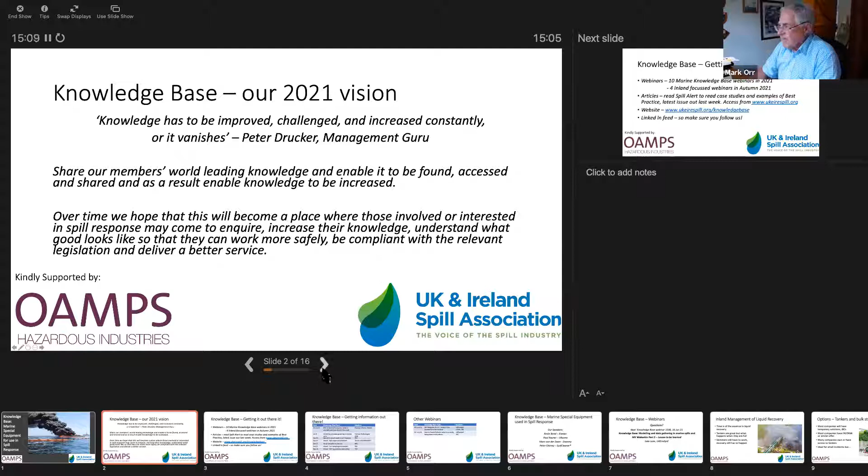And over time, we hope that our knowledge base, which is accessible through our new website, ukeirespill.org, will become a place where those involved or interested in spill response may come to inquire, increase their knowledge, and understand what good looks like, so that they can work more safely, be compliant with the relevant legislations, and deliver a better service. And during this year, we're delivering 10 marine knowledge-based webinars. We've got 4 inland-focused webinars, which will be in the autumn of this year.

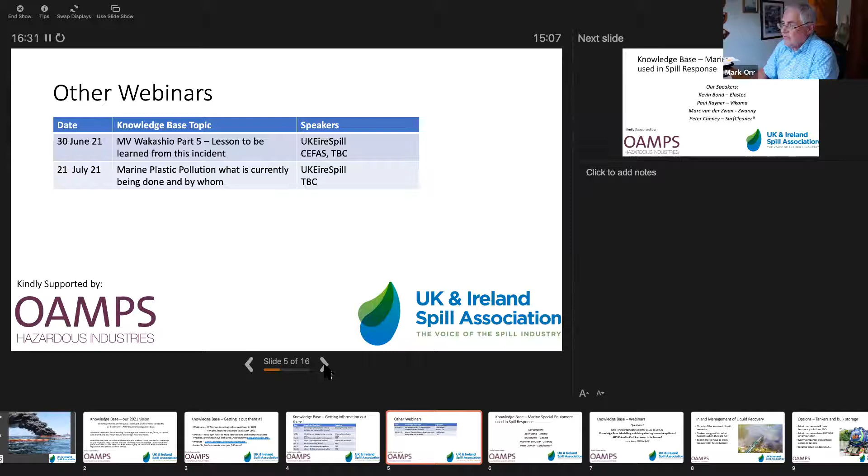In particular, we've been following the MV Wakashio, which has had a lot of learning come out of it. A lot of learning is still to come out of it, and we'll be hosting a webinar which will try to bring together the lessons to be learned from this incident. And then we're also doing one on marine plastic pollution, and some of the products we're going to talk about today are relevant to its recovery, but we'll be doing a marine plastic pollution one in July.

So today we're talking about marine special equipment. Now, what is marine special equipment? Well, we've called it that because really we needed a catch-all to cover the things that we haven't covered so far. So in the webinars that we've covered so far, we've done skimmers, absorbents, dispersants, we've done booms, and really, we've done those 4. And really, this is a sort of catch-all for anything that we haven't quite covered so far.

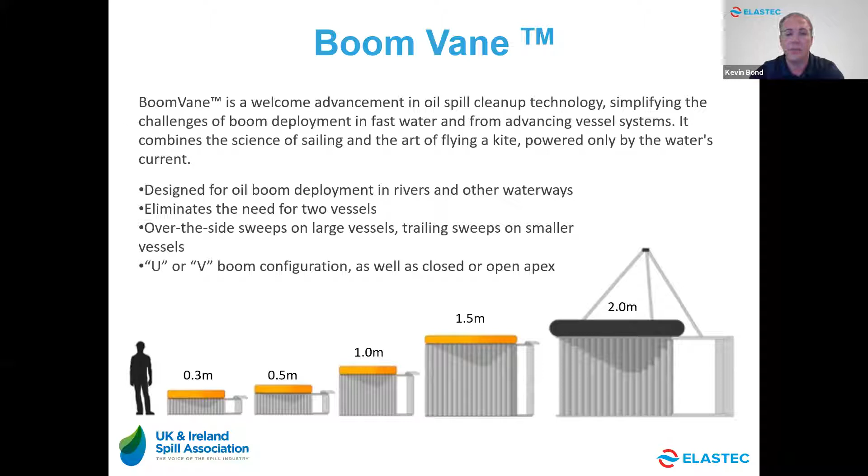So the smaller boom vanes, mostly designed for shore-based operations, shallow waters, less than a meter deep. And then you've got the boom deployment for fast currents without using boats. It can also be utilized in wider rivers with sweep operations as well.

The half-meter boom vane, also designed again for fast-moving shallow rivers. We use it extensively on training courses we have at our workshops twice per year.

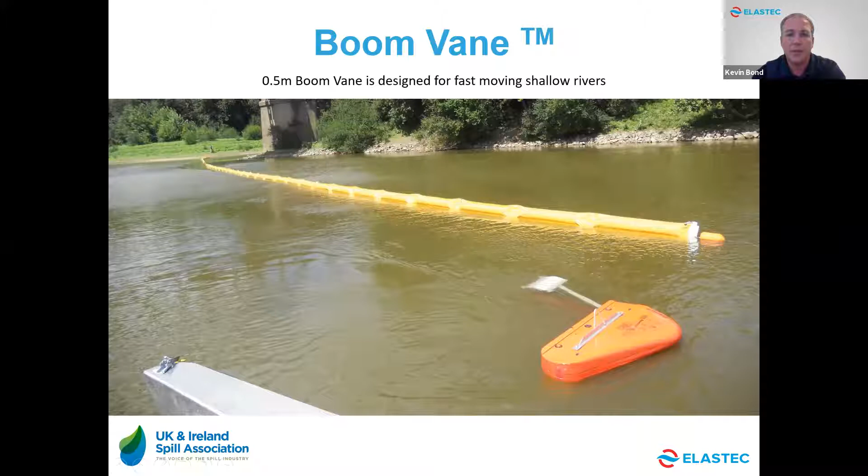The 1 meter boom vane, again, very useful with side sweep systems. There's the X150 system that we have. There's also the Current Buster. There's other sweep systems available that these particular vanes are very useful with for single ship operations.

The 1 meter boom vane is constructed with vertical wings, again, utilizing the current. It's held by a single mooring line. It swings out towards the opposite shore or from the vessel and tows the boom. Very powerful, light and handy tool, enables you to be operating in waters with heavy traffic. It's got a control rudder on it, so you can bring the boom vane back to the shore or back to the vessel as you need to.

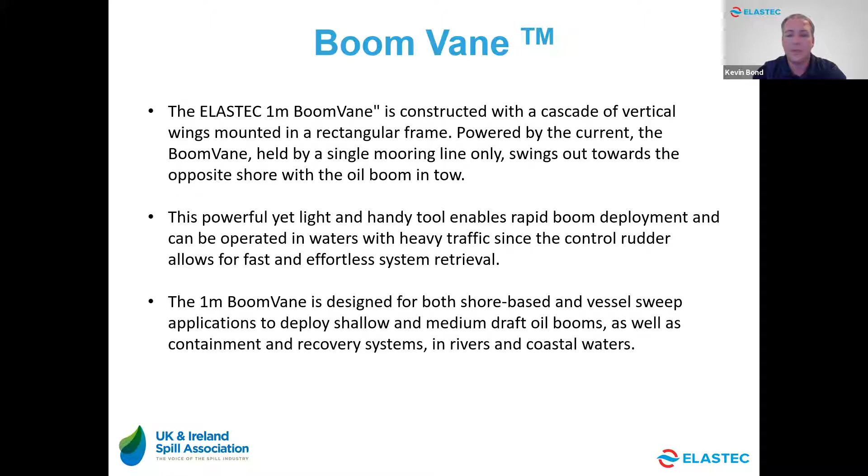So the next size up, the 1.5 meter boom vane, proven for mostly offshore situations, towing booms and fast sweep products. 200 meters of offshore containment boom. It's easily towed in different configurations, and gives you the ability to maintain sweep operations over long periods of time.

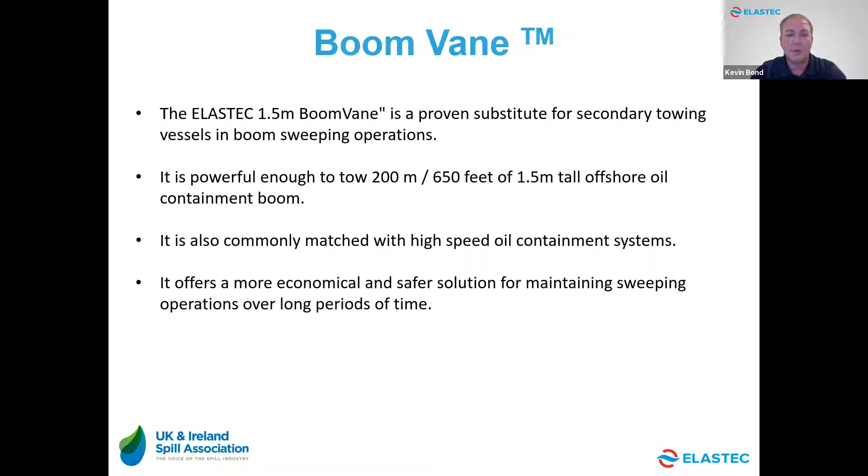Again, you need to have the right vessel with the right equipment to be able to maneuver this boom vane into the water. Same with any offshore operations, you need to make sure you've got the right vessel at hand.

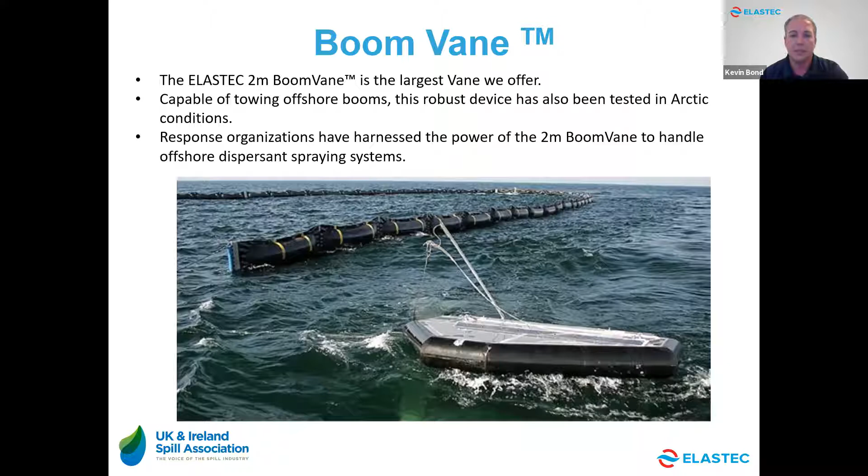We also have the larger 2 meter boom vane for the more serious offshore situations. It's also been tested in Arctic conditions, so it's really the offshore response organizations utilizing this system as well. So different size boom vanes for different operations. And again, you can see some of the size differences there, just how big the larger one can be.

I'm just going to run through a short video here. Hopefully it works. Hopefully you can all hear it.

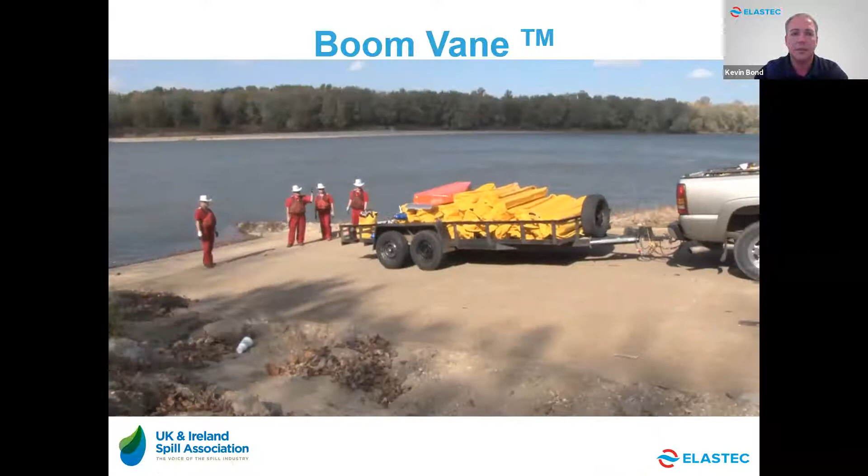This is just going through a typical deployment of a boom vane in a river. This is the 1 meter boom vane. So the guys now are just heading further up the shore to put in the tow line. Mooring points can be any sturdy trees or ground anchors, whatever you're able to find in the location.

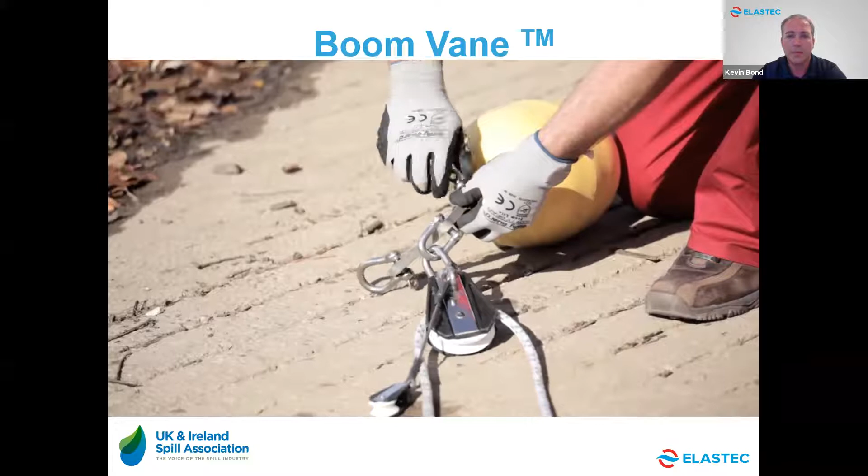You will need some assistance to get the boom vane into the water, so safety waders and life jackets whilst on the shoreline. The orange reel there is the return line for the rudder. As soon as the boom vane hits the current, you can see it operating and pulling out into the middle of the river. Typically, shallow draft booms operate best in this situation.

And in this situation, it's important to work out where your catch point is going to be for the boom, and making sure that you've got enough area to put a skimmer in or whatever recovery device you're going to use. You can use a series of these systems going up and down the river as needed, depending on the spill and the spill site. So now they're just reeling in using the return rudder.

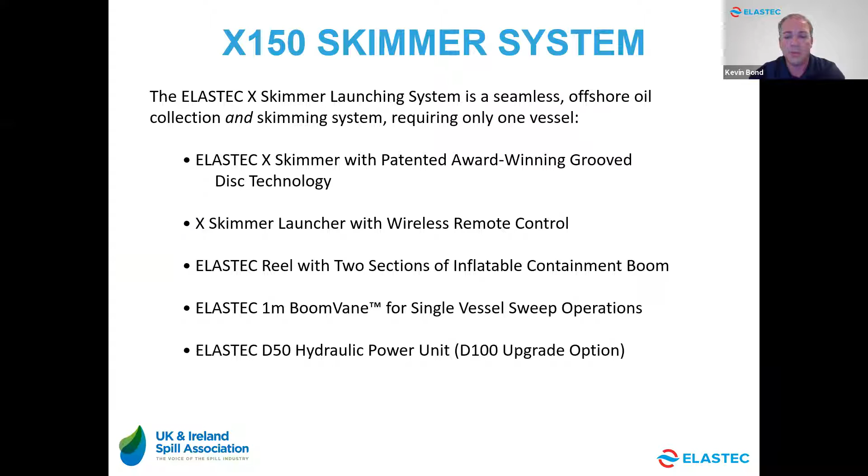It can be self-contained, so you can keep it in a container for shipping. Makes it very, very transportable. You can deploy the system in about 30 minutes, depends on how many boom sections you've got and the experience of the crew. We recommend a three-man team for the operation, 1 for controlling the remote, and then 2 just to make sure that everything's all connected up okay.

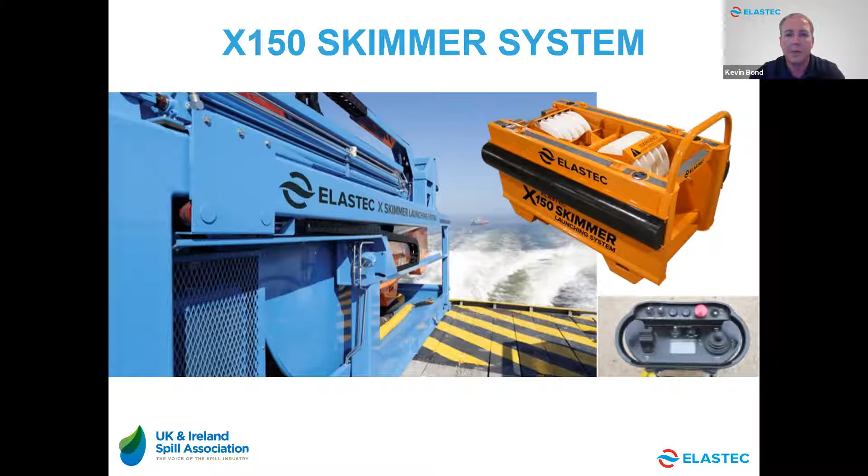So you get the remote control system there, and then just some more detail of the X150 skimmer. And we'll go into a bit of detail on the design of the skimmer in the video towards the end of this part. So the skimmer itself is a centerpiece. It's easily deployed using the crane on board. It can be towed at speeds of up to 4 knots, and the system in up to Beaufort Scale 4, which, as recommended, is usually the maximum limit for crew safety when you're out offshore.

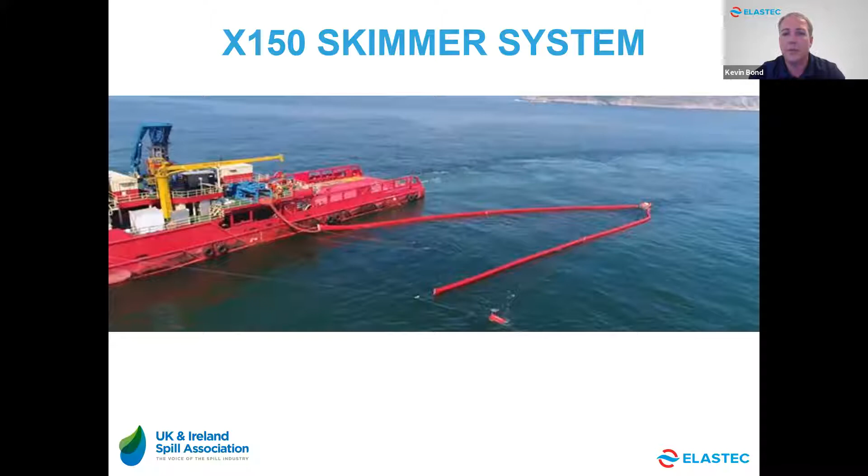The collected oil is transferred to the towing vessel directly from the skimmer. It's got the integrated hoses there from the skimmer pump straight back on board the vessel. Just some pictures of the system in use. You can see the boom vane there at the bottom of the picture with the towing booms guiding the oil into the skimmer, and then the transfer hoses coming back on board the vessel. Just a rear view shot giving you the profile of the system.

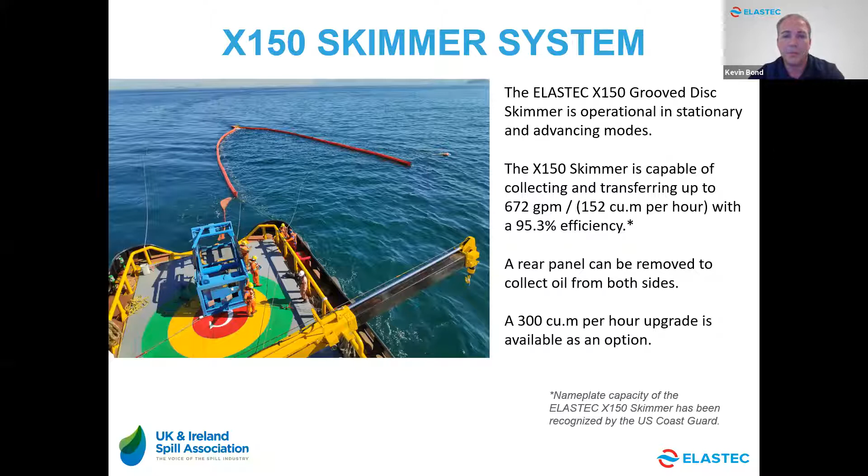So you can operate it in stationary or advancing modes. The skimmer will draw the oil towards it. But in this particular mode, you're looking at advancing skimming systems. You can collect with this particular system up to 152 cubic meters per hour with a 95% efficiency. You can increase this depending on the pumps which are situated on board the skimmer. So with that upgrade on the pump, you can double the capacity. And again, I'll just do a short video on that system itself.

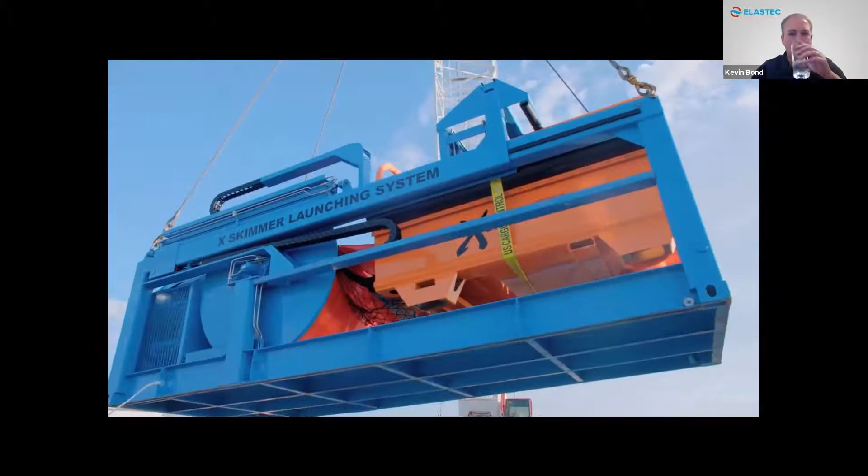We're here at Port Fourchon here in the Gulf. This is home, this is where we started. This is how we know if we've got a successful product. If we're there and we're doing it ourselves, then we know that our clients are going to be satisfied. We're going to ship around the world. They have to open that box. That product has to work. There's not very many people that go the extra mile that we do. We have a diverse product line. They're backed up with our quality, our design, our service, our experience. We feel good about what we do because there's a global need for these products.

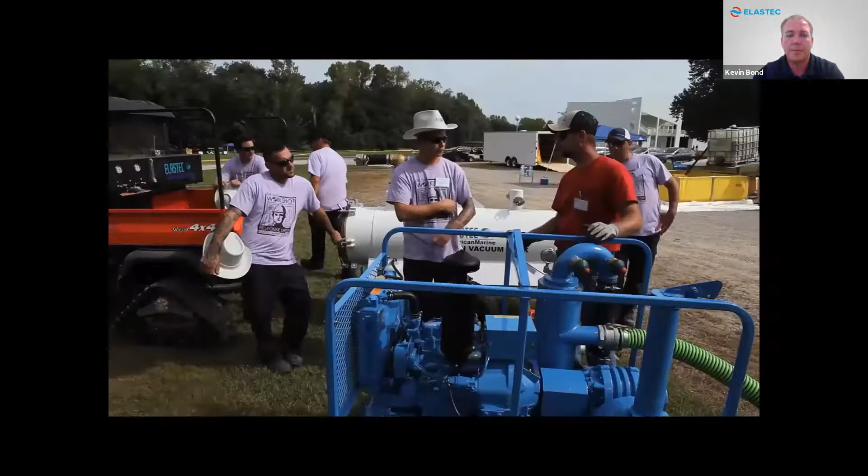Containment booms, controlled burn operations, a full line of skimmers to pick up all oil types, vacuum systems, incinerators. We have a very popular small line of incinerators for medical waste. We sent equipment to Africa for the Ebola outbreak. We have products for all of those types of issues. We like to offer complete solutions to all types of response. All of those things are helping to keep the world clean. And to me, that's what Elastec is all about.

During the Deepwater Horizon, we were burning oil offshore. There were, of course, skimmers and dispersants used, but most of the skimmers there really didn't catch that much oil. The skimmers that we employed at the Deepwater Horizon were just not up to the task. Old skimmer technology was overrated and it underperformed. We saw a need in oil spill recovery and felt we needed to have a different type of skimmer to be able to deal with oil spills.

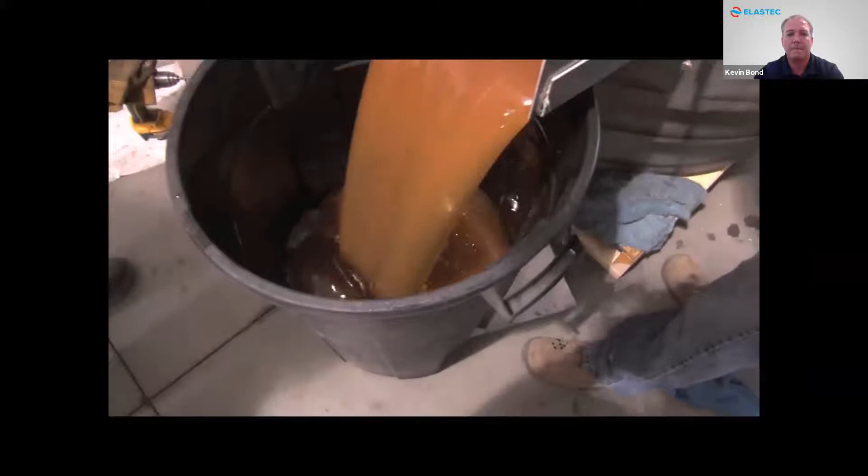This is the Wendy Schmidt Oil Cleanup X Challenge, the $1 million contest to build the world's fastest skimmer. For the competition, we scaled our disc skimmer to pick up 5 times more oil than any skimming system that has ever been built. What can I say? We built the best skimmer in the world. Please congratulate our $1 million first place winner, Team Elastec American Marine.

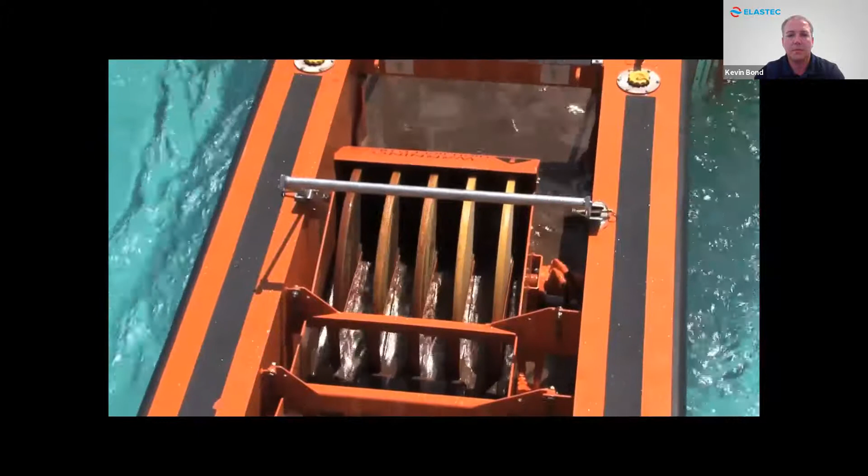Well, now we're into a commercial version of the X skimmer. This is the X150. It has 10 discs, and we're ready to take this to the marketplace. We can use the X150 in advancing mode up to 3 knots. We can also use it in a stationary mode or near shore or harbor applications. We had the opportunity to build the perfect skimmer. I think we pulled that off.

The X150 launching system skimmer is a turnkey operation. Everything that you need to do the job is there. It's an integrated device that allows you to launch and retrieve the skimmer, the boom, and a boom vane with a single vessel. It only takes 3 people to operate the X150. One person actually running the remote, and then a couple of people to keep an eye on things. It's a very simple operation to do.

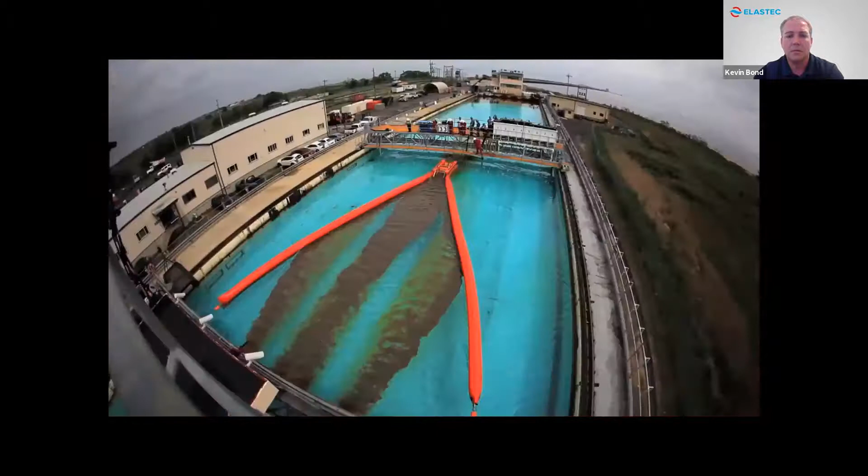When you're using our boom vane, you can operate with a single vessel tow system. This will operate the system up to 2 to 3 knots. The X150 will recover up to 660 gallons a minute, 150 cubic meters per hour, doing light, medium, and some heavy oil recovery. I'm pleased to announce the X150 is the first model in our new line of X skimmers. The X150, it's a whole new ballgame.

So that was just a brief there on the X150, again, born out of some of the Deepwater Horizon issues that they found with traditional skimmers not doing what they needed to do. Also born out of the Deepwater Horizon spill was some of the fire boom testing and the results that were found. I'll just run through some of the details of that through this presentation here, and then I'll hand over to Paul.

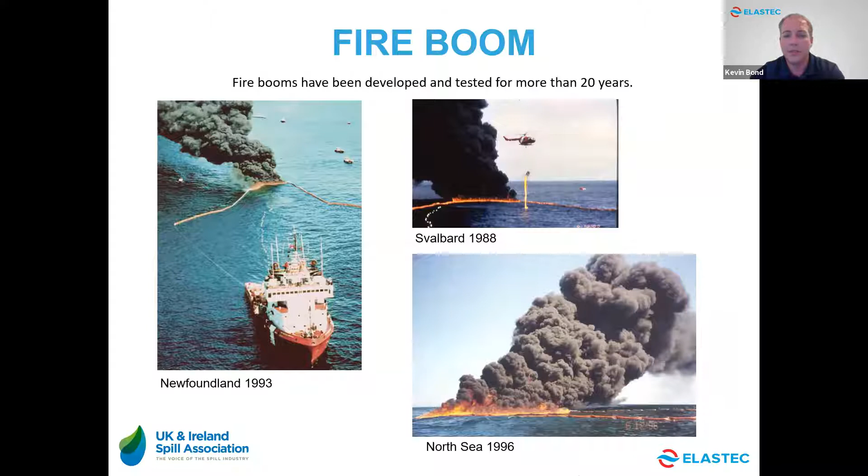So these were developed and tested for more than 20 years. They just never really had a real life situation like the Deepwater Horizon to test them in. You've got Svalbard there, 1988, Newfoundland 93, and then the North Sea 1996. So plenty of tests, and also in test tanks that had been done in the past. The small scale tests just weren't as intense as what was seen in the Gulf of Mexico.

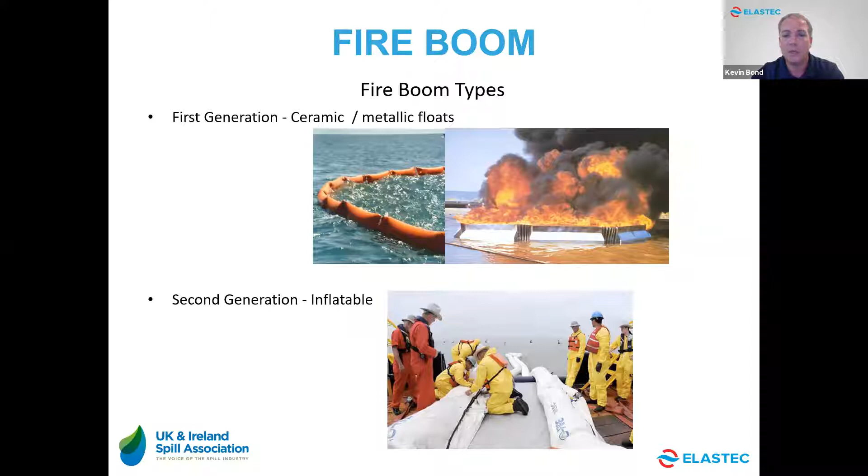The different types of fire boom: you've got the first generation, your ceramic or your metallic floats, your solid fire booms. And then you now have a second generation, which is the inflatable type, and we'll go into some detail on that shortly. The models that we used during the Gulf of Mexico: you've got the American Marine or 3M boom there, you've got the Hydro-Fire boom, and then you've got the Pyro boom. And then you also had the Oil Stop and a Kepner version, which we used.

So a total of 411 controlled burns were conducted from April 28th to July 19th. Using 5 different types and generations of fire boom gave a really good broad coverage of different booms used. It worked out during that particular spill that controlled burning was the cheapest and the best alternative to traditional skimming methods.

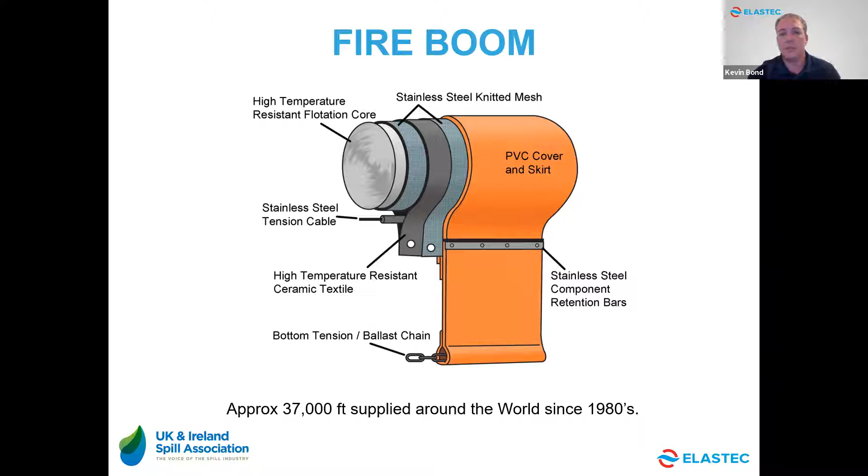So the American fire boom, again, solid flotation booms, PVC cover with a skirt, and then you've got the stainless steel mesh twin inside with a high temperature resistant flotation core. Then you've also got the ceramic textile in between the steel mesh, and then a ballast chain to make sure the profile on the water stays right. Once this is used, obviously the PVC cover does get destroyed in the temperature, but once you've got that back on board the ship, you can replace that by taking off those stainless steel retention bars and recovering it.

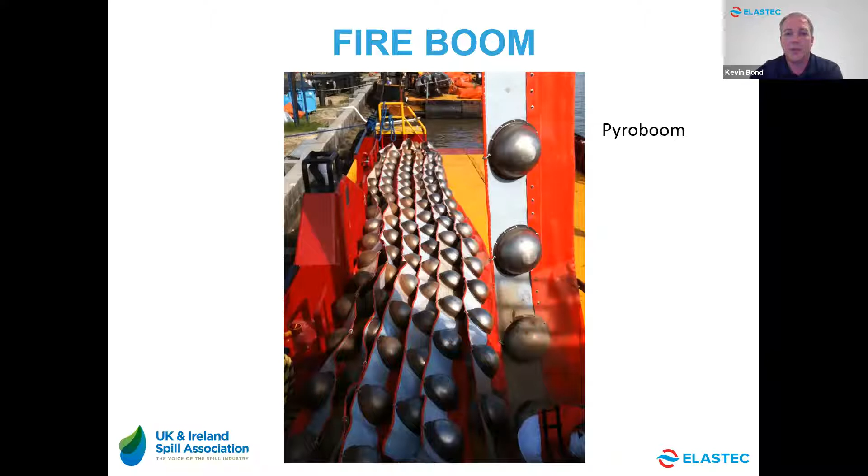Then you have the oil stop, again, a solid flotation ceramic boom. You also have the Pyro boom, which is more of your ceramic steel foam covered Pyro boom. Then you've got the second generation Hydro fire boom.

So water cooled, it's inflatable, and you might think, well, inflatable boom with fire doesn't actually go, but when it's got the water jacket going around it, it gives the fire resistance across its entire length. And you can deploy it and recover it without the use of cranes. As long as you've got your onboard boom reels, you can deploy and recover it, and then you can recover it again if the weather deteriorates.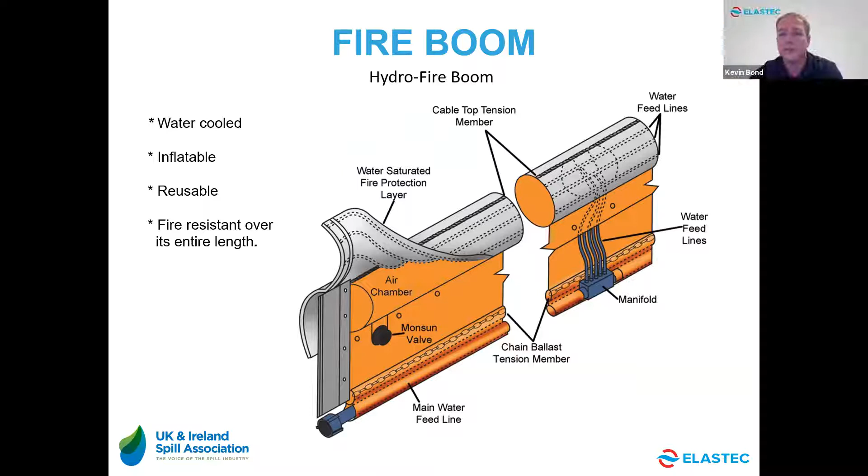So you've got the water saturated cover, the air chambers below it, and then pumping through the bottom with manifolds going up to the blanket. You've got your water, which coats the blankets, your feed lines. Containerized system, again, making it easy to ship globally.

And in this particular situation, so the Gulf of Mexico, the on-site management team consists of the O'Brien's Group, Elastec, and the US Coast Guard. So a total of 240 people, 49 vessels, 15 burn teams, and 3 task forces.

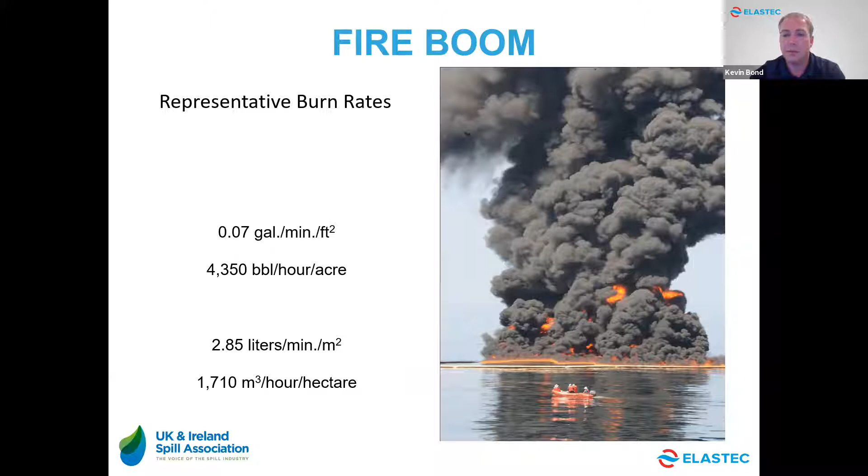So to start the fires, there's a couple of options. More recently, there's a drone version, which NOFO were utilizing and testing with not too long ago. You've got a heli torch option, which is probably not the most preferred version because it can be sometimes difficult to light it. If the conditions allow, then just floating ignition devices from a boat as close as you can get to the oil. So representative burn rates give you some of the ideas there of what can be expected by utilizing fire booms.

During the first trial burn, so it was about an hour in length, they managed to actually get the burning plans and the approvals and procedures in place to be able to utilize the fire booms during the spill in the Gulf.

So multiple burn teams were created. That meant that they could go out in shifts in different areas wherever the oil was, utilizing different booms that were available to them. And then one particular day they had the Mega Burns Day, which was June the 18th, and they managed to dispose of an estimated 70,000 barrels of oil. So that was a good result for cleanup day.

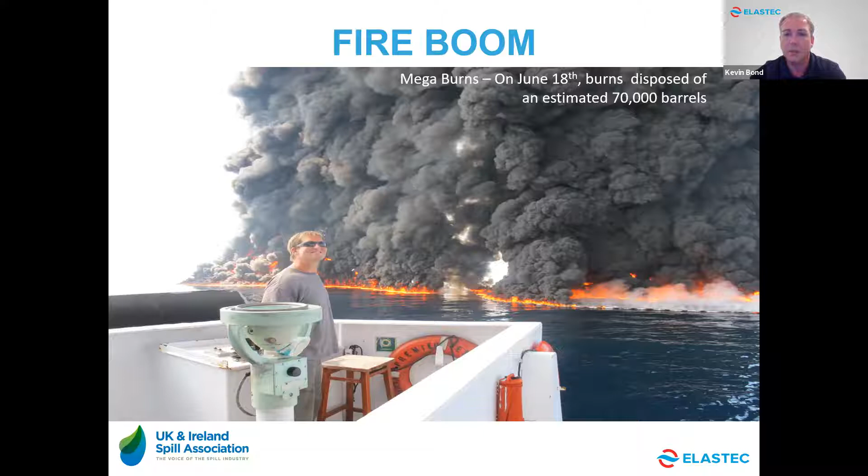Throughout the spill, all the emissions were monitored by the Environmental Protection Agency, and details were noted. So aerial surveillance during this was absolutely critical to make sure that the boats were in the right position. They could keep an eye on things and then monitor the fires and the oil as the spill went through.

We also found that the fire was jumping from the boom being towed. You had a nice pocket of oil which you can then have on fire. Depending on how the oil moved, if it got away from the boom apex, it would come out behind it and also set some other oil patches alight.

So the Hydro fire boom in particular had the longest recorded burn of 11 hours and 48 minutes, and then also 10 hours and 20 minutes, and that apparently set a Guinness World Record. I didn't realize there was a world record for fire boom. So it just goes to show that in the right conditions, you can actually burn quite a lot of oil.

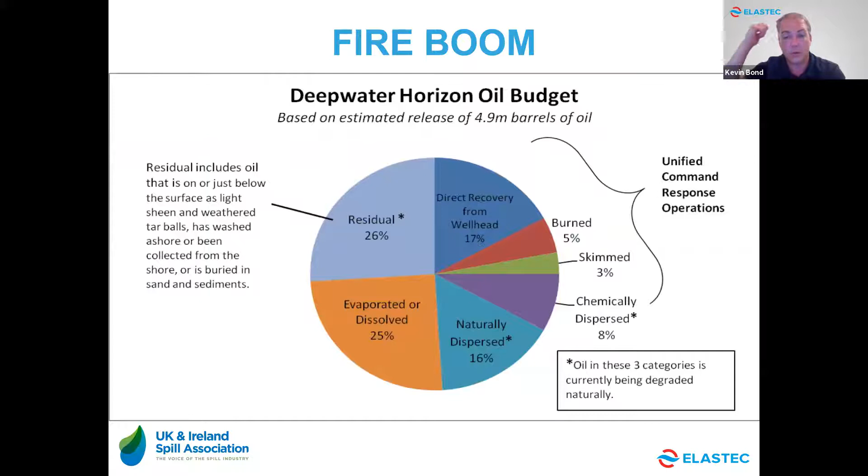So the actual burned oil and skimmed oil seems actually a very small amount compared to what was actually spilled. So only 5% of the spilled oil was burnt, but then also only 3% of the spilled oil was skimmed. But the amount of time and effort required for skimming that oil was massive compared to burning the oil.

So again, I'll just run through a video here and then I'm almost done. I'll just finish off with a couple of conclusion slides and then I'll hand over to Paul. Is that right, Mark?

In April 2010, the Deepwater Horizon oil rig exploded in the Gulf of Mexico where 11 lives were lost. The blowout resulted in a catastrophic oil spill of almost 5 million barrels covering approximately 30,000 square miles of the Gulf, and led to an unprecedented oil spill response, the most challenging and complex the United States has ever mobilized.

Due to the massive amount of oil being spewed into the Gulf, 3 aggressive oil recovery methods were authorized: mechanical skimming, dispersant application, and controlled burns. Controlled in situ burning, or ISB, proved to have an impressive success rate. Over the course of the spill, 411 controlled burns were conducted, destroying over 300,000 barrels of oil.

During these operations, there were 5 brands of fire booms deployed. Among them were 2 Elastec systems, a Hydro fire boom, and the American fire boom. The Elastec Hydro fire boom was the most successful system used in the ISB.

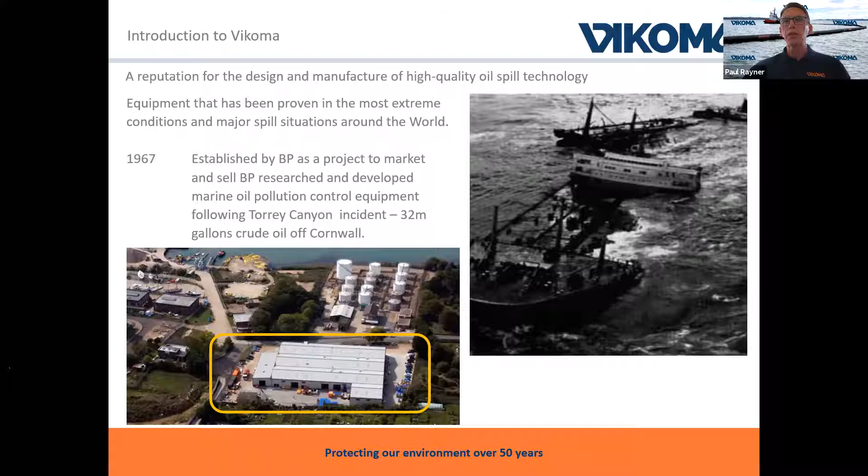So Vikoma International, one of the real world-leading companies within the industry, established in 1967 after the Torrey Canyon spill. Based on the Isle of Wight, where we have a complete design and manufacture facility, and we supply equipment all around the world. So my name's Paul Rayner, I'm the sales director. As of next year, 30 years experience at Vikoma, working predominantly in sales, but also other areas. So quite extensive knowledge of the international market.

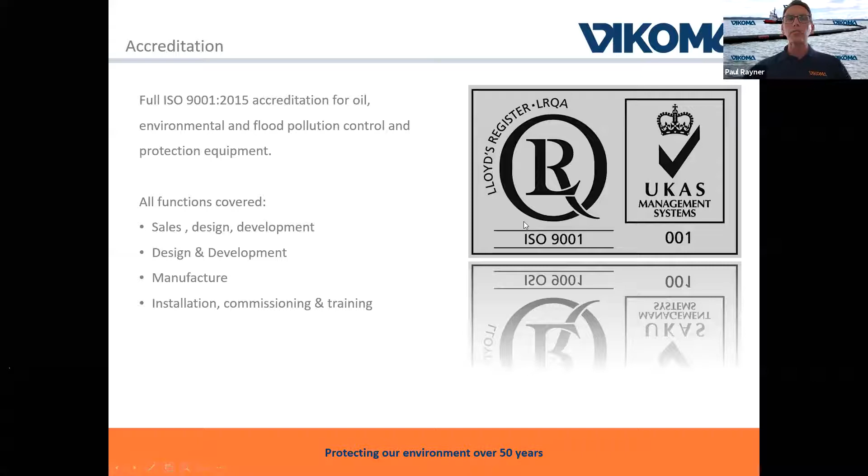Vikoma is an ISO 9001 company. In fact, we're having our Lloyd's audit today, which was quite a challenging combined on-site and hybrid virtual audit, which I believe is going well. And that covers all of the sales, design, development, and manufacture of our equipment.

3 key values of Vikoma: innovation, quality, and reliability. So quality, really key. You actually need equipment that's going to work. Reliability, you don't have a spill every day, so it needs to work when you need it. And innovation, really important, listening to end users, listening to responders on how to make things better, how to make things safer, how to make things more efficient and easier.

So when Mark asked me to look at sweeping systems, I thought, okay, we're going to talk about side sweep systems, but there are also actually a number of traditional sweeping systems, from U and J configuration, even a 3 configuration, which in all my time I've never seen, and I think would be the most difficult thing to control in the world. Also V configurations, and then what are traditional side sweeps?

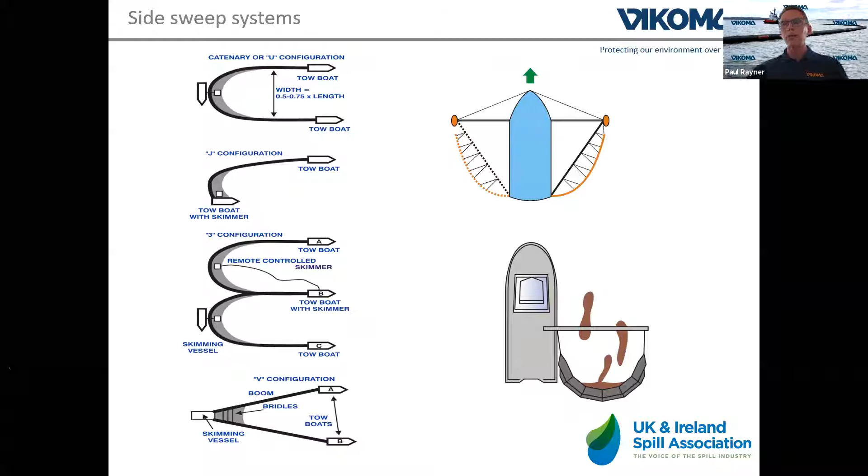So usually using a sweeping arm and a boom deployment over the side. There have been options with sweeps on both sides of the vessel and single sweep systems as well from one side of the vessel. Traditionally this uses a sweeping arm attached to the vessel, a boom which is deployed around that, and then a recovery system which is either built into the boom system or deployed into the boom apex. The idea being to deploy the vessel into the spill and allow the spill to come into the apex of the boom and then be recovered.

So typically this is between 1, there's been talk of up to 3 knots. I'm really not convinced on the logistics of trying to control something at that speed and not lose a significant amount of oil behind the boom due to entrainment. So it's really important to have a highly trained crew when you're doing this, people who really know what they're doing. And there are integrated systems with side sweeps.

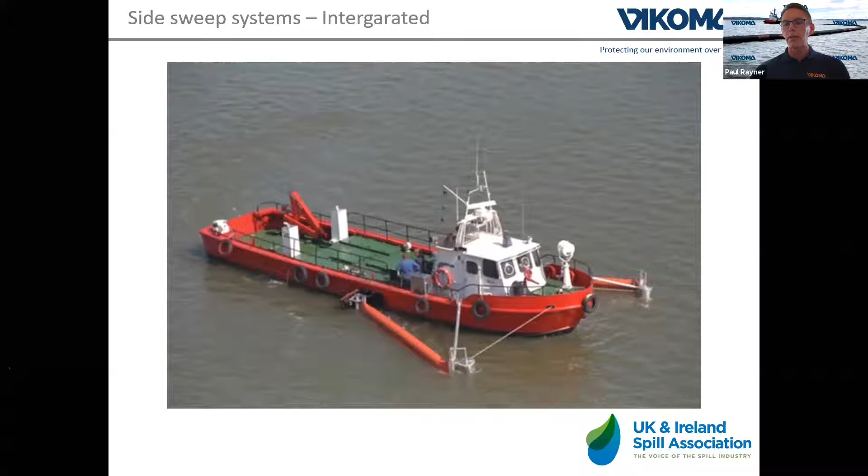So this is where the skimming system is built actually into the vessel. Here you can see a relatively small vessel with 2 lightweight sweeping arms, and the skimming systems, which are brush skimmers, are built into the hull of the vessel. So the vessel steams into the spill, the oil is deflected either side of the bow into the recovery deflector booms and then into the skimmer system itself. You can see another version there with a very lightweight sweep system with a boom deployed, which allows you to then put a skimmer inside.

So the most traditional system is to have this combined sweep and skim recovery. This would be where you deploy your sweeping system with your boom, you start to collect the oil, and then you recover with a skimmer. And really the speed of this dictates how much oil you're collecting and the thickness of that oil in the apex of the boom, and how effectively you can deploy the skimmer into that apex.

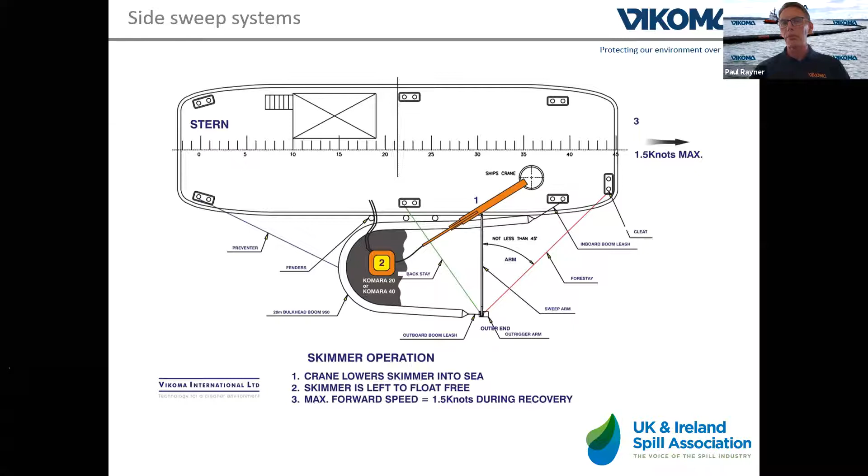There are quite large and also quite simple sweeping arms, and it really depends on the size of the vessel, the application, so the area you're skimming, and the speed that you want to operate at. So here you can see a Vikoma lattice sweeping arm. This is an 8-meter sweeping arm with a 1.2 meter height boom behind it. So this is really quite a large system and would be deployed on a rather large vessel.

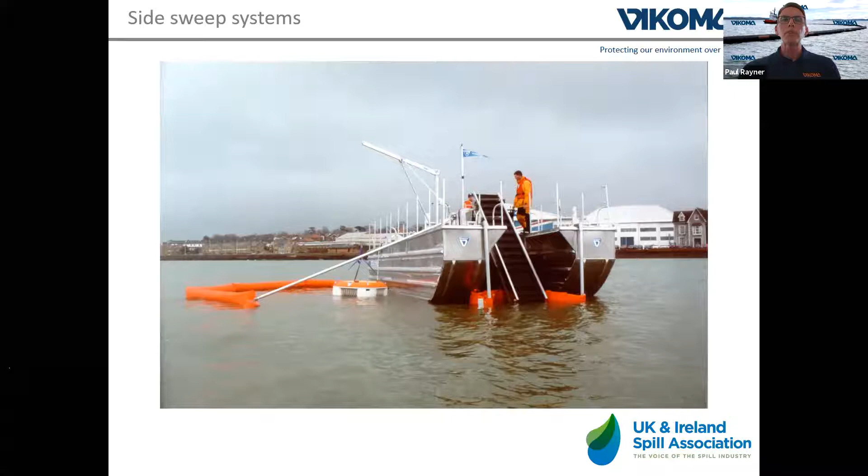You can also see very simple lightweight skimming systems. So if you're going to be deploying sweeping systems in a harbour, a much more lightweight system where you don't have to have such a robust sweeping arm and can deploy the boom and skimmer, as you can see in this picture. Simple and lightweight really does work if you've got smaller vessels and if you're in sheltered waters, so ports, harbours, sheltered coastline. This allows you to have a lightweight, usually aluminium tubular design sweeping arm, which is attached to the side of the vessel. We'll touch on this attachment in a moment because it's really quite key to how these work. And then you can see the boom deployed behind the sweeping arm to collect the oil.

When you get up into much larger sweep arms, it's really important to have a good connection system which allows the arm to actually move up and down and from side to side. This is to allow the flexibility of this arm to maneuver when you're on the water, particularly at sea or in offshore applications. So here you can see a quite complex and extremely heavy duty universal joint system to allow that movement. And it's quite key to understand how you're going to fit this to the vessel.

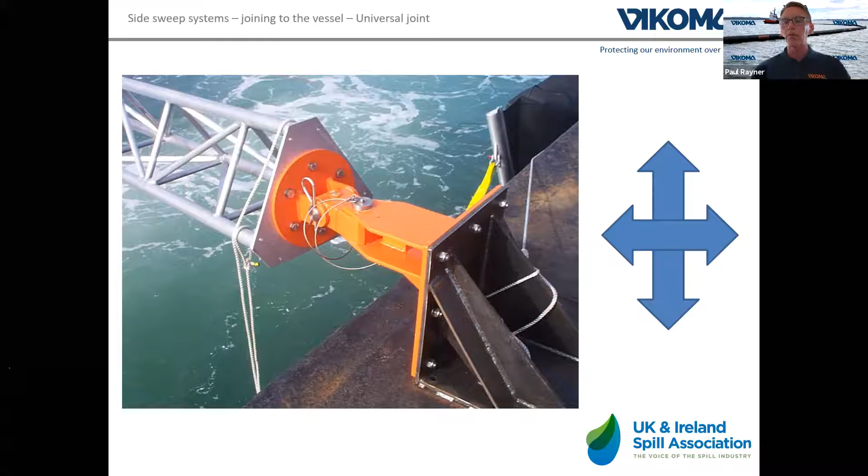In this case, this has actually been temporarily welded onto the deck of the vessel. It's really important to understand what sort of vessel you're going to deploy these from. So whether they are already prepared to take a sweeping arm, whether they're fitted with the mating half of this universal joint so that you can bolt them on, whether you're going to temporarily weld them on, or whether you're going to use things like gunnel clamps.

And these things exist. We've supplied them over the years. Other suppliers also have these. It shouldn't be underestimated, though, the forces that are involved when you're actually sweeping. If you can imagine a 6, 7, 8 meter sweeping arm with 20, 30 meters of boom in a U behind it, this is acting like a huge sea anchor. So you really do need a very robust anchoring system to join this onto the vessel. So it's a very key point to understand how you're going to use this and where you're going to use it.

It's also interesting to note, though, Vikoma got involved with utilizing sweeps without the need of sweeping arms. So here you can see, for example, our Fasflo skimmer. This is a combined sweep and recovery system. It can be towed along at 4 knots. The oil is forced into the deflector booms and then forced into the skimming system. This skimming system is a weir skimming system where the baffles inside the Fasflo effectively slow down the surface water and allow for a separation of oil and water. So the oil is collected in the back of the skimmer and then pumped back to the mother vessel.

And you can see here that a HIAB is actually being utilized to hold these booms open to act as the sweeping system. So another view there. It should be noted again, the forces that are involved in this. As soon as you get up deploying at 1 knot, 2 knots plus, there's huge forces involved. So whether you're actually advancing into a spill or the spill is advancing into you and you're acting in a stationary manner, huge forces involved. So you'll see in this sweeping system, these retaining wires inside these deflector booms to stop them being basically ripped apart. This system here is actually recovering oil in this skimmer at the back, and this will do 30 to 40 tons an hour, and its bigger brother will do 60 to 70 plus tons an hour.

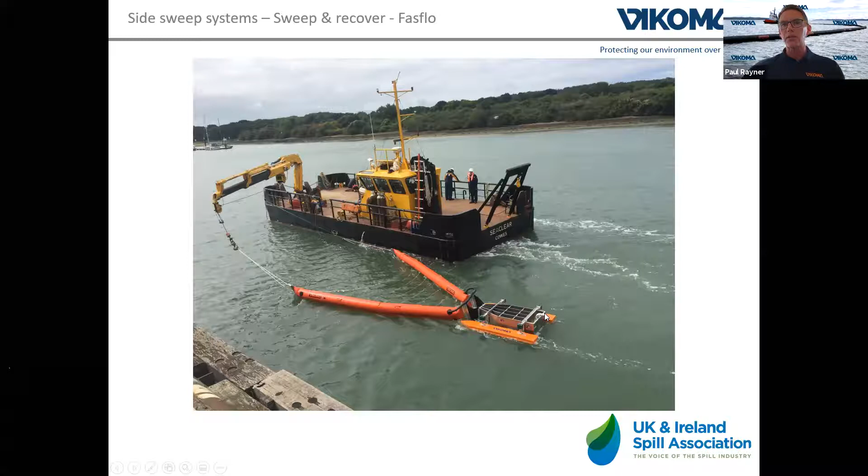We also have some really quite elaborate sweeping systems. Vikoma is well known for a product called Weirboom. This was a combined boom and skimming system where the skimmers are actually built into the boom. So we developed a product called Cusp Weirboom, which is a much smaller version where the skimmers are built into this cusp area. This would be the apex of the sweeping system. The deflector booms are here to force the oil into this apex and then allow it to be recovered. So the oil is forced into the boom. The boom has openings into the back where there are pumps to pump that recovered oil away.

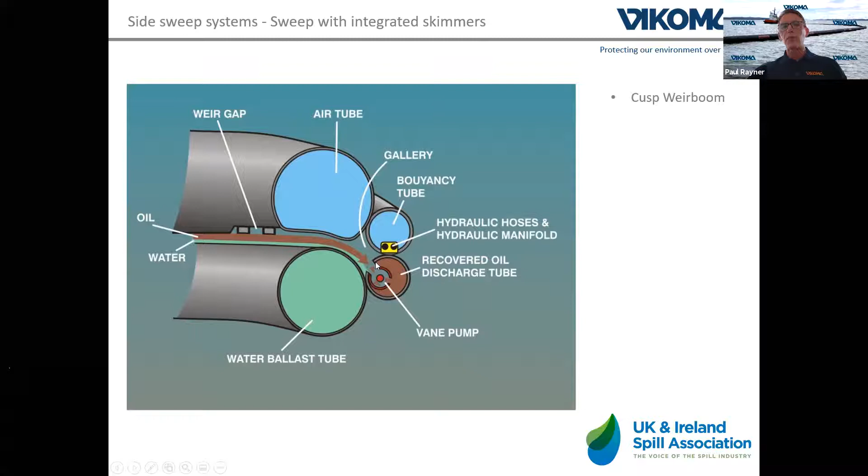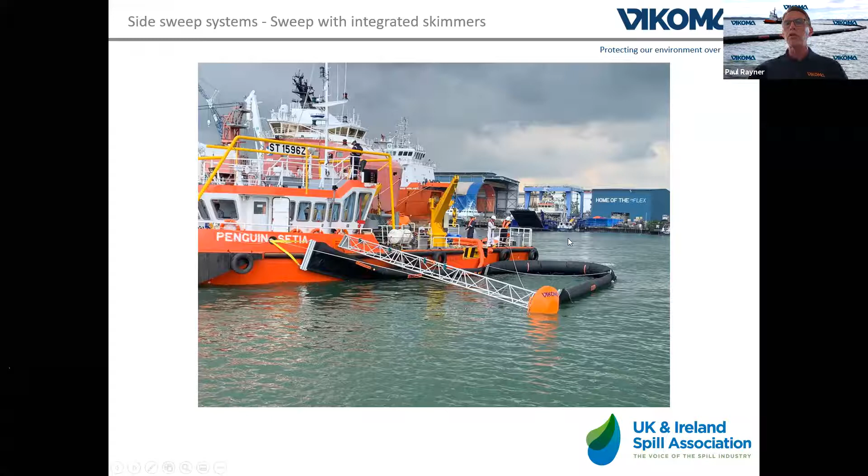So you can see here a sweeping arm being deployed. Again, a large aluminium lattice structure with a float on the end. Really important. You can imagine the weight of these things until they're supported. The boom is deployed here and the skimmers are actually built into the back of the boom. This allows the oil to be recovered as you're advancing and pumped back onto the mother vessel or onto temporary storage behind the mother vessel. So you can see again the picture there. This is the cusp part, the deflector booms, and then the sweeping arm.

And you can see on this vessel, they had already mounted permanently on the side of the vessel the mating half of the sweeping arm. So this meant it was ready to be attached very quickly. You can imagine if you wanted to find a vessel and then start drilling holes in it or welding on it, you've really got to have some thought and some plan for how you're going to utilize this type of system.

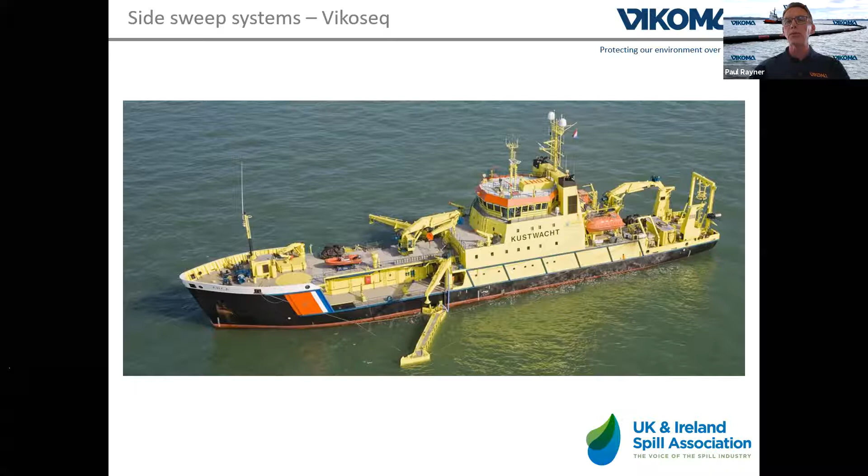We also, with Koseq, they have a compact system. So this was everything basically on a skid. So everything can be deployed from that skid with a built-in crane, a smaller rigid sweeping arm, which basically floats along the side of the vessel and sits up against the vessel. So this means you don't need to do any modifications to the vessel. You just need to lock down this skeletal frame with these isoblocks, and then the sweeping arm can be deployed over the side.

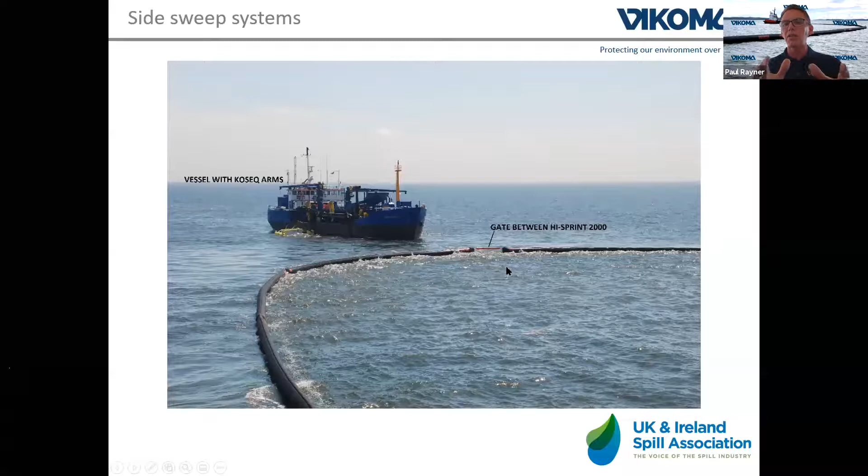If you look at EMSA, it's a good example where they use this type of sweeping arm technology with rigid arms, and they use a system which is often referred to as enhanced sweeping. So this is where you deploy a more conventional sweep using vessels ahead of the skimming vessel and force the oil into that pocket, and then basically force the oil out of this pocket into the skimming vessel. So this consolidates, condenses the oil, if you like, and forces it into the skimmer vessel behind.

So you can see an operation there, the two towing boats, a large enhanced sweeping system, the gate there opened, and the oil recovery vessel coming behind it. So the idea being this oil is forced into here and then into this skimming vessel. So this is really one of EMSA's key offshore recovery techniques.

With a gate boom, it's interesting to note you're actually trying to lose oil, so quite unconventional with a boom. This is where the oil's forced in, but then is consolidated into that apex and then forced out through openings within the boom, so it can be recovered behind the boom. So this allows the oil to have a large collection area as you sweep, which is really quite key.

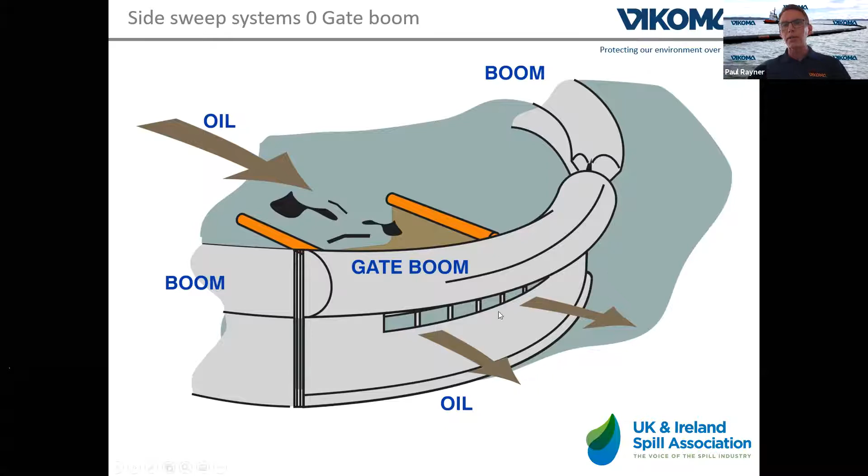You can imagine if you were using a side sweep that's 5 meters, you're sweeping a swathe width of 5 meters. If you're deploying a boom system first, you could be having a swathe width, a sweep width of several hundred meters. So you can imagine the amount of oil you can collect and force down into this gate boom, which then allows the oil to come out the back and into the skimmer recovery vessels. So you can see there one version of a gate boom which was developed for Vikoma Hi-Sprint. So actually an opening within the boom system, and this could typically be 400 to 600 meters of boom making up this sweeping system.

So I thought we'd end up though with things to consider, because there's actually a lot of key things that you need to consider. The type of sweep you're going to use, the size of the sweeping boom, the type of vessel. Is it going to be dedicated or is it a vessel of opportunity? If it's dedicated, are you already going to have the mating part of the sweeping arm fitted on there so that you can just bolt it in or clip it on and deploy quickly? If it's a vessel of opportunity, how will you attach the sweeping arm? If it's a vessel of opportunity with a HIAB or a crane, could you utilize that for the sweeping system?

Very important to understand the logistics, this attachment point, temporary or permanent. Have you got cranes on the vessel to be able to lift the sweeping arm over? Are you going to be able to fix the sweeping arm land side, at the port or the jetty, and then steam out to the spill? You're not going to want to be dragging your boom in the water as you're steaming out to a spill, because it's going to significantly reduce the speed that you can get there.

Very important to understand the sweep speed. So I remember seeing a customer, and they were talking about how they had a wonderful Excel sheet that measured all of the skimming capability of their fleet for sweeping, and if they went at 1 knot or 2 knots or 3 knots.

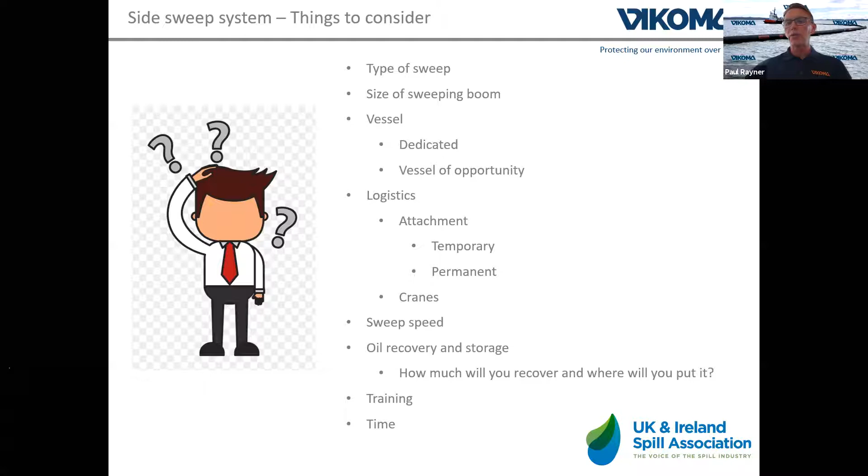So a bit of a quick run through of side sweeping systems. We've talked about different types, enhanced sweeping. We've talked about types of sweeping system with built-in skimmers so that you can recover at the same time. And then really importantly, things to consider. What do you need to think about before you use these systems?

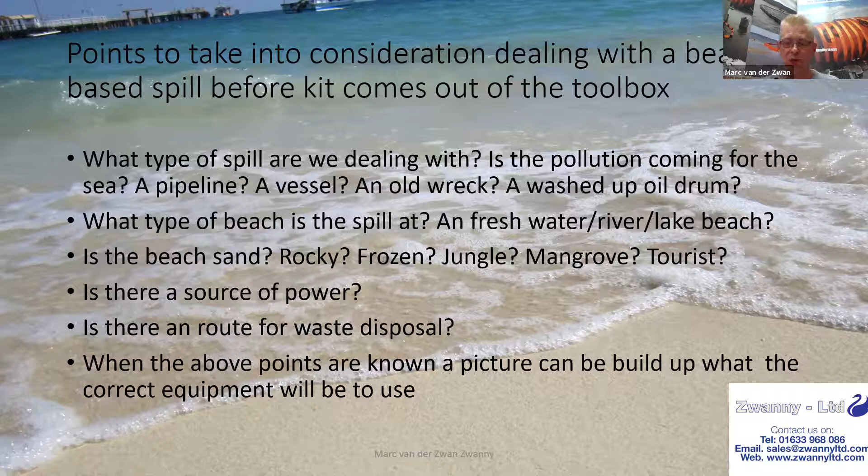And again, all these points are basically what you have to know to build up a picture of what tools and correct equipment can be used in a particular spill. I've taken the example of a sand beach spill, with equipment and some recommendations in that respect.

What is commonly used is actually a beach boom that can be connected to a nearshore boom. The beach boom obviously is inflatable. Normally it's manufactured in PU or neoprene. Lamor is one of the companies that offers a beach boom in PU, and it actually has an extra protection layer on the bottom of the boom. So if it's dragged over rocky outcrops, it protects the boom a little bit in that respect.

Another thing you could use on a beach, and this comes back to my first slide, what tools to use? Absorbents. Yes, you can use them on small beaches. Marine absorbent booms will contain the further flow, and pads and rolls can be used to absorb small hydrocarbon puddles on the beach. As you can see in the left picture as well, an area of the rocks is boomed off while the operator is making an attempt at cleaning the heavy fuel or crude oil shown in this particular picture that I found on the internet. I have to admit, I do not know who's on the picture.

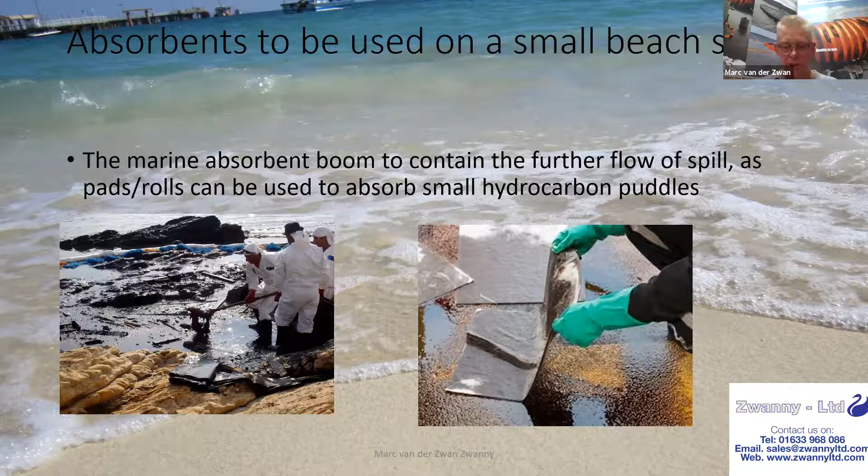It has been mentioned in a number of spills, but if you have not got absorbents, if you haven't got a beach boom, then there are also alternative, primitive options available. The likes of straw bales, or even human or animal hair netted into a boom, will actually take up oil, if you have got hair in that respect, Peter. So it is an option that is there as a cheap, well, primitive option, should we say.

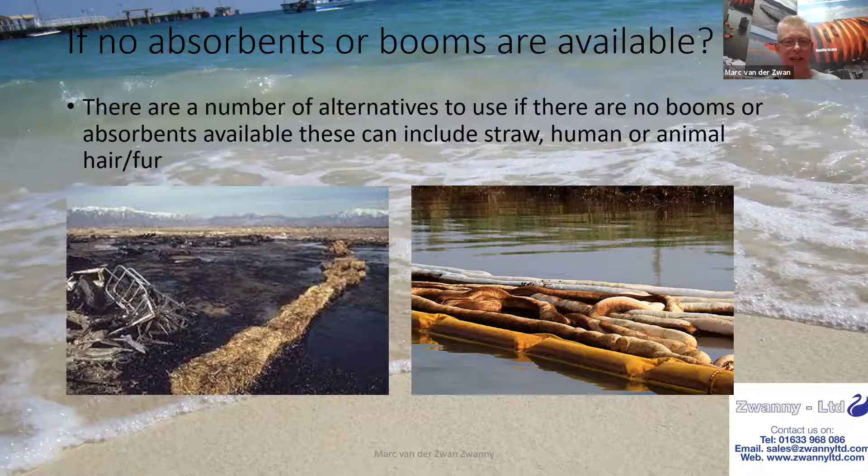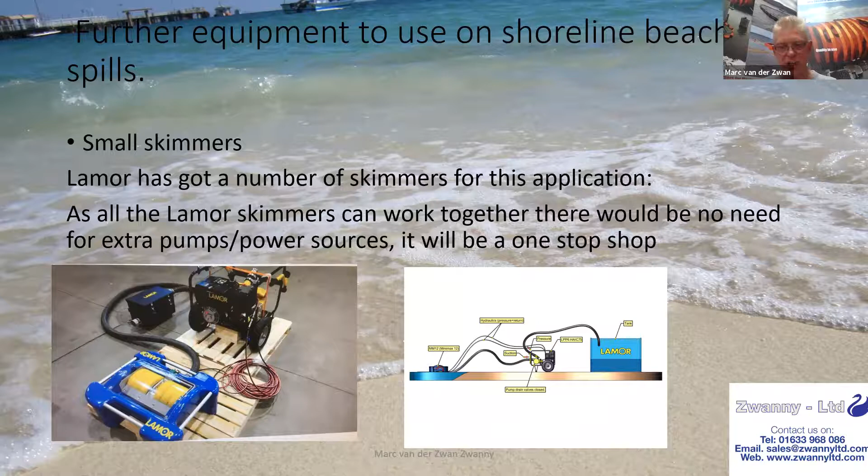Dealing with beach spills, there might be a power issue. That's not a problem. Lamor have actually overcome that, and they have got some very small power packs, the LLP 3.5 HA, which you see on the left. It's a two-man lift, and it will give sufficient power to power a small skimmer.

And on the other hand, you've got on the right-hand picture an LLP 6/7 power pack combination pump. And again, that is another option that is available that will also be used for other skimmers from the Lamor range, which I'll come to in a minute.

Basically, as I say, the power pack of the Minimax 12, you can see it here, is for near shore applications, and it will work very easily. The Minimax 12 has got an interchangeable skimmer option. You've got the brushes that will be used for various oils, and you can put a disc bank in there as well. Also, the Minimax 12 from Lamor has got a simple handle, shown on the left, that can lift out the cassette and put an alternative cassette in.

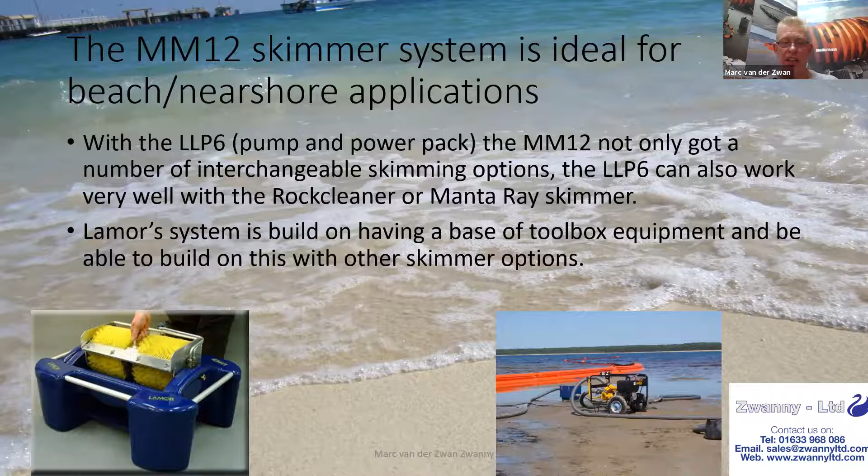As I said before, the LLP6 can be used with the rock cleaner or with the manta ray skimmer. The Lamor system is obviously built to have that extra toolbox equipment that you can build for other skimmer options.

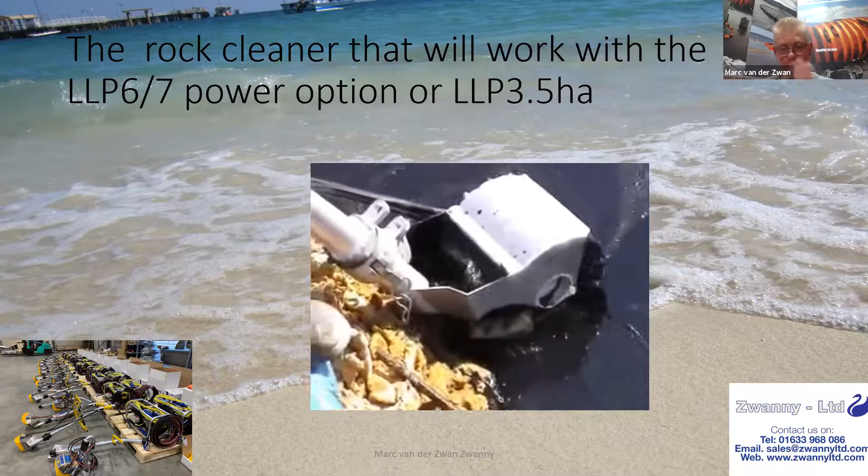And it's quite effective, and specifically for beach cleaning, this would also be a quite effective piece of equipment to use for very small areas. It's called the rock cleaner, so there's a bit of a clue in the title, so you can use it for rocks, but you can also use it for sand applications. It does what it says on the label really.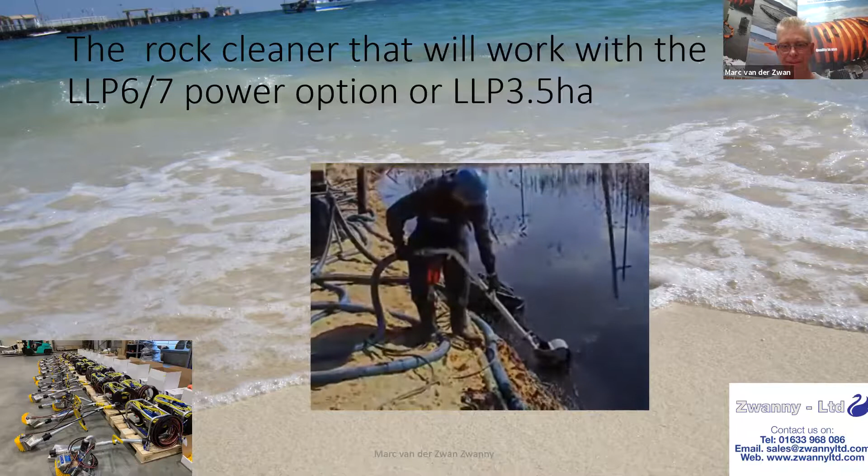Other skimmers, coming back to the power source, that will fit on there, or even on the end of a vacuum tanker: that's the manta ray skimmer. The manta ray skimmer is a shallow skimmer for light oils and shallow waters. It will surface on the top. And the beauty of the manta ray skimmer, which you can see on the left-hand side, is that it opens. There are other similar skimmers on the market, but the manta ray will never clog up with bits of wood, bits of bird, or any other pollution that comes on the beach. And this is a miniature video. I hope you can see it.

Although it's used on a little brook, a riverbank, it sits very shallow, and basically it's connected to the pump, so it could be the LLP6, LLP7, or a vacuum truck, and it will take out the layer of oil on top of the surface.

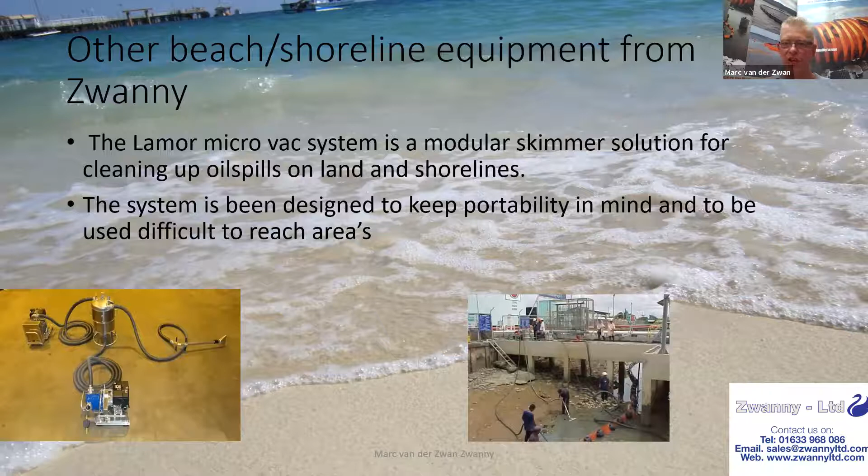Other beach equipment, for example, Lamor do a micro vac system. It's a modular skimmer solution for the cleaning of oil spills on land and shorelines. The system is designed with portability in mind, and used for very difficult areas that could be difficult to reach, as you can see.

Where do you put the collected oil? I mentioned that earlier. There are a number of tanks, but you could also dig a pit on a beach with a liner as temporary storage, and that could later be collected with a vacuum truck. Or, as you can see in the right-hand picture, just use a standard IBC, and it will fill up in no time. And that can be interchanged all the time when the IBC is full.

The other beach cleaning equipment, Mark touched on that a little bit, but this is something for the future as well to look into. And the Portbin shoreline cleaner. It's actually still being tested by the Norwegian Coast Guard, and it's a new type of vacuum system as such, and I hope you can see it.

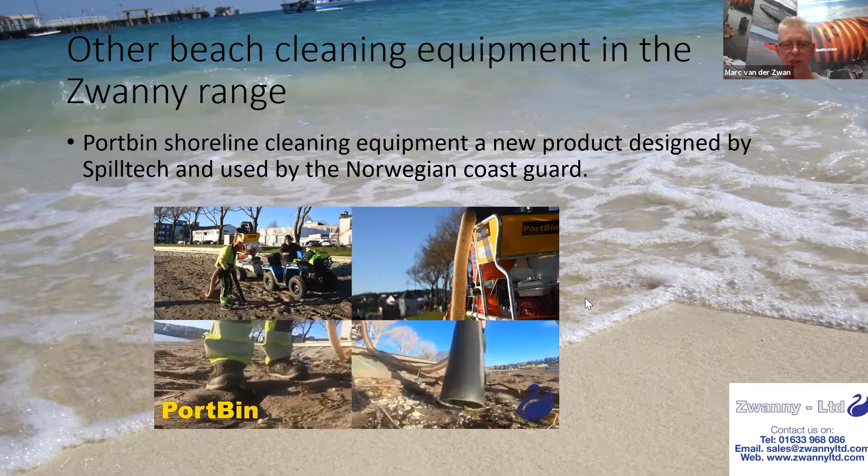It's a two-man operation, and it's designed for land-based spills to take out a lot of the debris that is lying on the beach. So it could be plastic, it could be bits of oil, it could be tar balls, etc. And it's a very simple, effective tool to have in the toolbox as such.

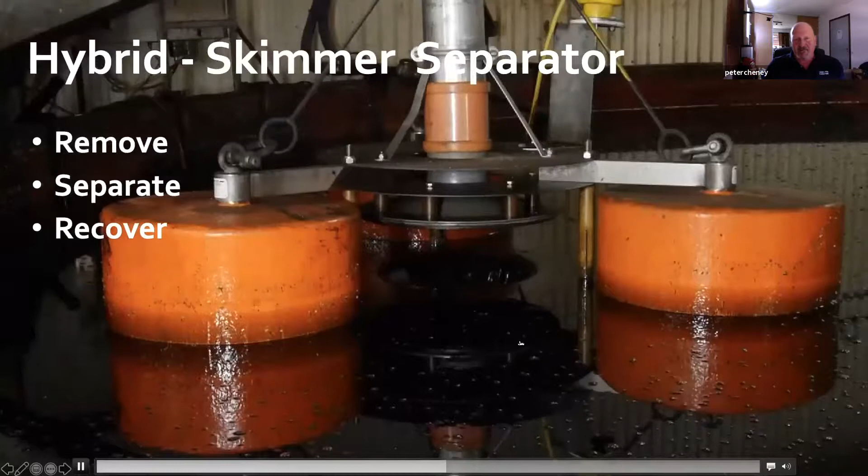So just to give you an idea, it will remove everything from thick sludge like you can see now, and it will also remove a sheen, and it will also remove up to medium viscosity oils.

Now, floating pollution can be anything from large solid objects, bits of wood, gloves, plastic. The smaller version, the one I'm going to present today, will remove up to 7 centimeters, and our much larger version, which I'll present hopefully later on in the year, will remove up to 150 mil size solids. The uniqueness about the Surf Cleaner is it will then separate the pollution inside the machine itself.

And many years ago, when the product was first launched, Lamor did testing and noted that the water content within the oil was between 0.1 and 0.5%.

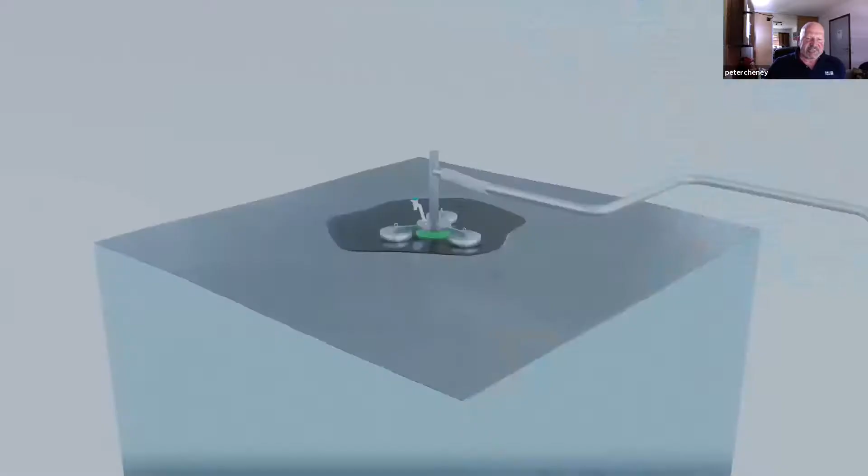Just to explain how the system works, this is a larger version, the animation, but the systems are pretty much the same. So on the bottom of the Surf Cleaner, you have a propeller, which draws down the bellows of the Surf Cleaner, and this allows the oil-water mixture to enter inside the Surf Cleaner. It will then hit off some deflection discs, which slow the velocity of the oil.

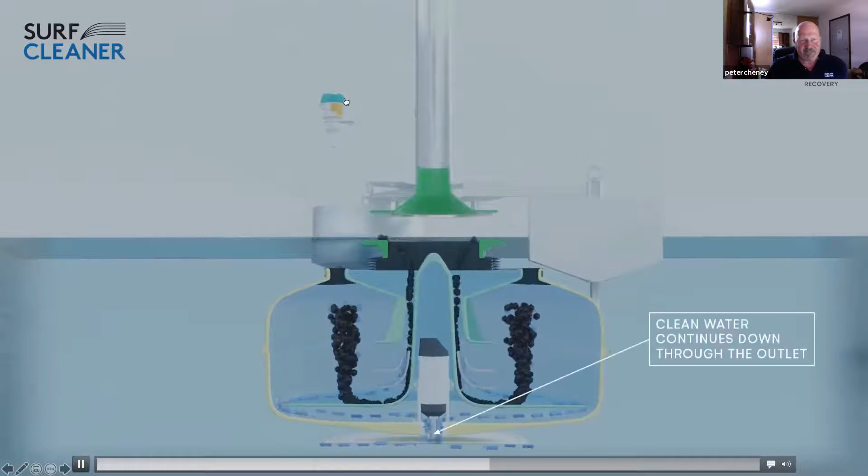The natural buoyancy of the oil allows it to float up to the top of the Surf Cleaner, and the water will then just carry on out through the bottom. And then there's a sensor up here on the larger model. In the smaller model, it's on the motor itself.

And when the level is reached, this will send a signal to the propeller to go into reverse. And using the dynamic adaptive piston pump, it will use the water as a piston to push the oil out either into a tank or a portable tank or into your tanking system.

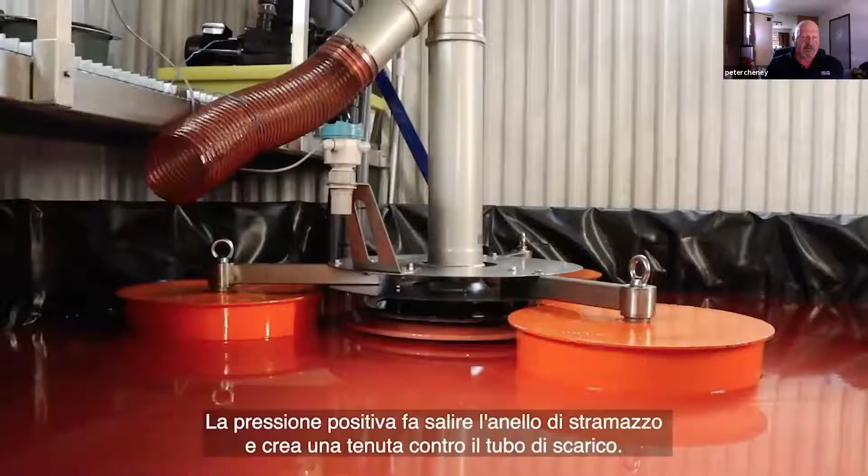This is an example of the purity of the oil being discharged. You can see here, this is the larger model, but again, there's no water being discharged from a weir skimmer, which is, when I first heard of a weir skimmer with such low water content, I didn't believe it. I had to go over and find out about it.

So the Surf Cleaner itself is unique in that there are no hydraulics being used, there's no pneumatics, there's no power pack, it just plugs into the electricity. There's no pump, it uses a propeller to push, uses the water as a piston to push the oil out. And there's virtually no noise. All the mechanics are actually under the water, so it's very, very quiet. The biggest model is actually quieter than a text message you would get on your phone.

Both machines across the range are all fully automatic. They will adapt to the conditions. For example, if you've got a sunken vessel in a harbour and you don't know when it's going to leak oil, you can actually place the Surf Cleaner there and that will continually operate. And then when oil comes up, it will send a signal to you. So it acts as a detector and also operates right away. So there's no waiting for a crew to arrive to boom off and to get skimmers into the water. The machine will automatically do that.

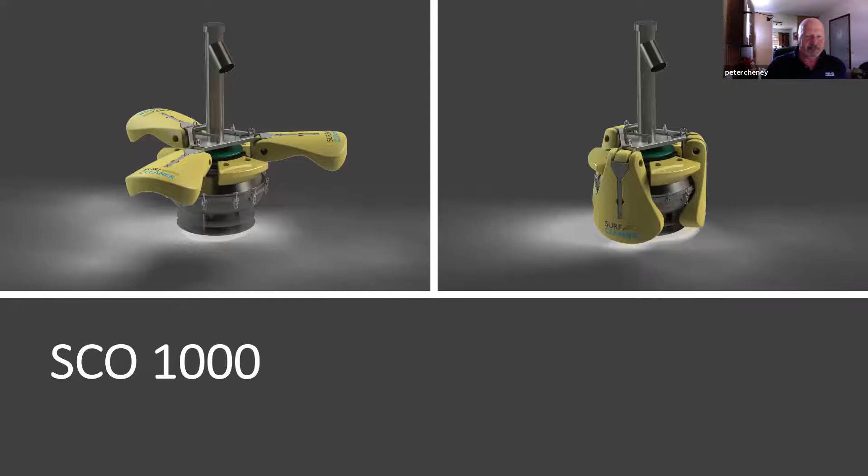This is just a setup for use in maybe a remote area, because the Surf Cleaner is very light, it weighs less than your luggage going on the plane. We have remote tanking systems ranging from 20 litres up to whatever you desire. The unit can be operated with a smartphone or with a tablet. And also it can be operated with an inverter from a car battery, 12 volts to 230 or 110. It can operate on 230 volts, 110, 24 volt. Because it uses so little power, these are all options that you can have with it. Again, this is just testing in our testing facility in Norrköping in Sweden, using a phone.

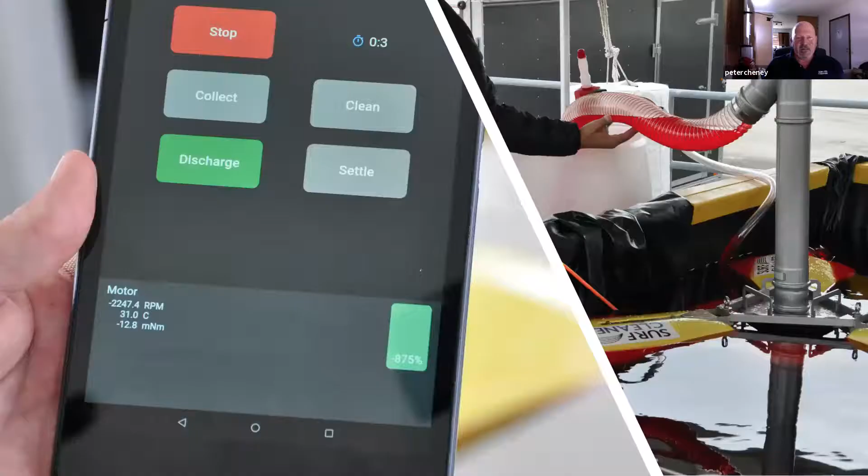And here we have testing done in Texas by Ultratech International. They're our distributor in the USA. And again, it shows you the temperature of the motor, what speed it's going at, how much it's recovered. And these are all figures that can be logged and kept for analyzing.

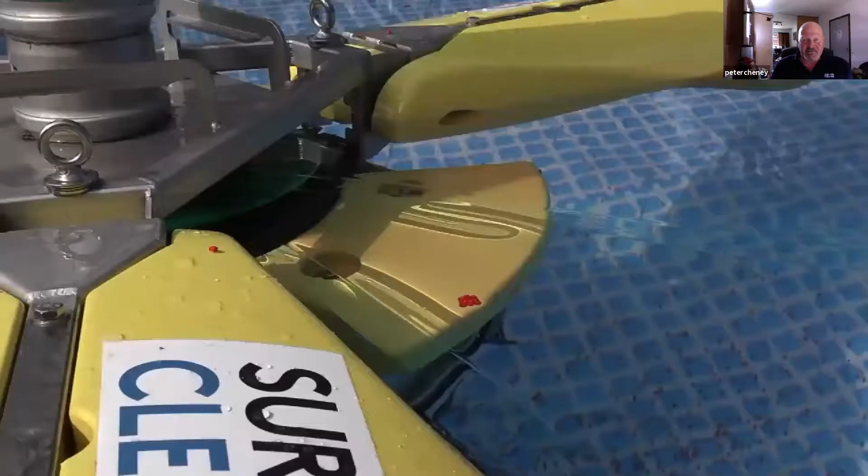This is a small video of the tests that were done in Texas. So they poured in 30 US gallons, which I think is about 200 litres, of a very thin mineral oil that was dyed. The oil's so thin it's difficult to see, but that's just pure oil. Now, they put in some small beads so that you could actually see the draw of the Surf Cleaner, and you will see a few cycles of recover, then empty, and you'll see it draws the beads from quite a distance away. So this will continually operate until there's nothing left, and within a short space of time, you can see the water coming through and the oil just going into a thin sheen. So that will continue like that all the time.

Now, as I said, the Surf Cleaner will have a flow through of about 7 cubic meters, and in that it will separate pure oil at 1,000 liters per hour. Now, it may not sound a lot, but that is pure oil. So if you were using a normal weir skimmer, you would have lots of water content and need much more storage space. So 1,000 litres of pure oil with less than 0.5% of water.

It can recover and separate less than 0.1 micron, which is pretty good. It can recover solids up to 70 millimeters. It can operate in depths of 45 centimeters, and it weighs less than 25 kilo, I think approximately 23 kilo. The power usage, again, 20 watts, not very much. And we also have ATEX certification for the smaller model too, and that's down to zone 0.

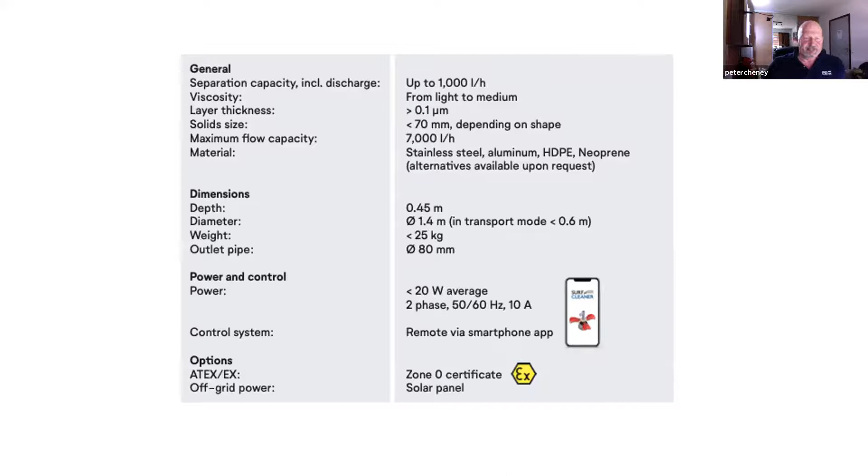I will also be coming over to the UK August, September, maybe October. We'll be doing some testing with Briggs Marine Environmental, so we'll be doing some shows there. If anybody's interested in attending any of the shows, they will be all over the UK. It won't just be in the north of Scotland. So we will be holding road shows. And if you have enough customers that are interested, we'd be happy to try and fit in a testing at your facility.